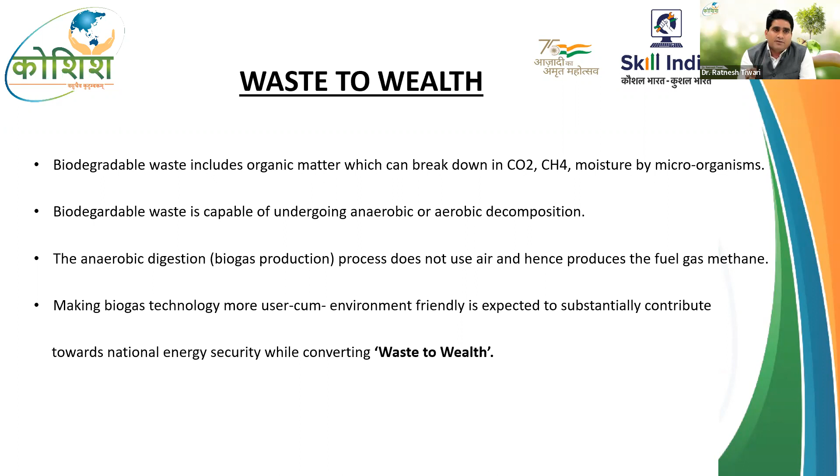Biogas production refers to degradation of biodegradable waste in the absence of oxygen, known as the anaerobic digestion process. The total biogas production in India at the moment is around 2.07 billion meter cube per year, however our potential is much more than what we are producing at the moment.

So biogas is the mixture of many gases: methane 55 to 60%, carbon dioxide 35 to 40%, and other gases like H2S and water vapors are also there.

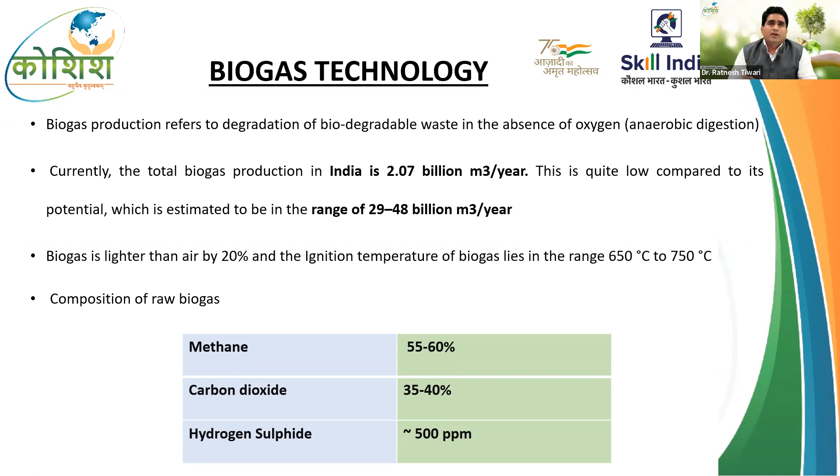If we compare biogas as a clean fuel with other fuels like LPG, CNG, and firewood, the calorific value of raw biogas is 20 megajoules, while LPG and CNG are 46 to 50 megajoules. But after purification, when we extract CH4, the main gas from biogas, it gets compressed and filled into cylinders. That purified biogas, after extracting methane, will have almost the same calorific value as LPG and CNG.

So this is a very useful gas for our energy needs, and it's also very clean, as this is renewable energy produced from waste itself, creating wealth from waste.

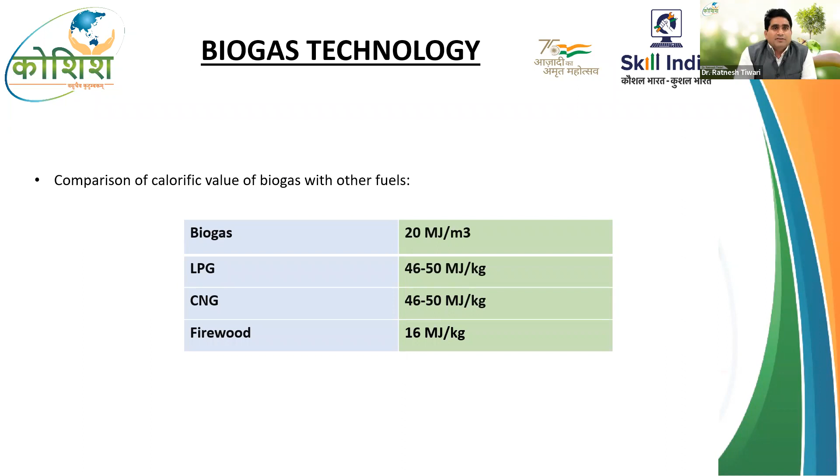The basic process of anaerobic digestion involves 4 reactions taking place: hydrolysis, acidogenesis, acetogenesis, and methanogenesis. Since organic matter has a very complex structure, microbes play their role in decomposition and fermentation of this organic waste, and lastly methane, CO2, H2S, and water vapors with some other small amounts of gases are produced.

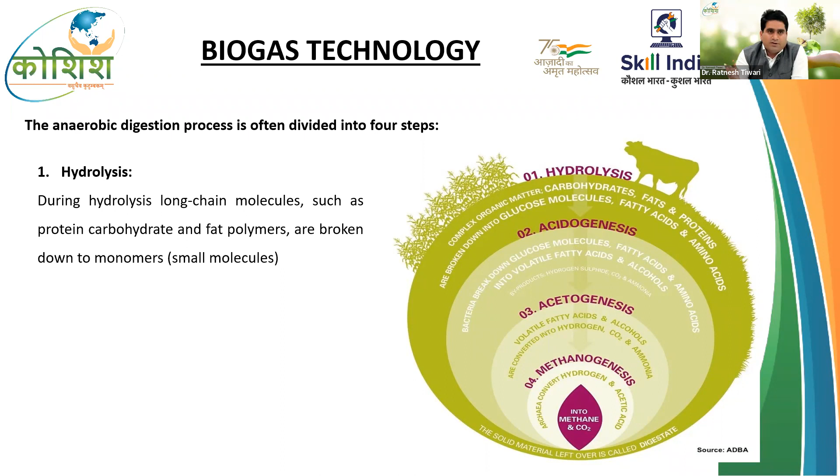So these mainly 4 reactions are taking place inside the digester, and after that, the biogas is getting produced.

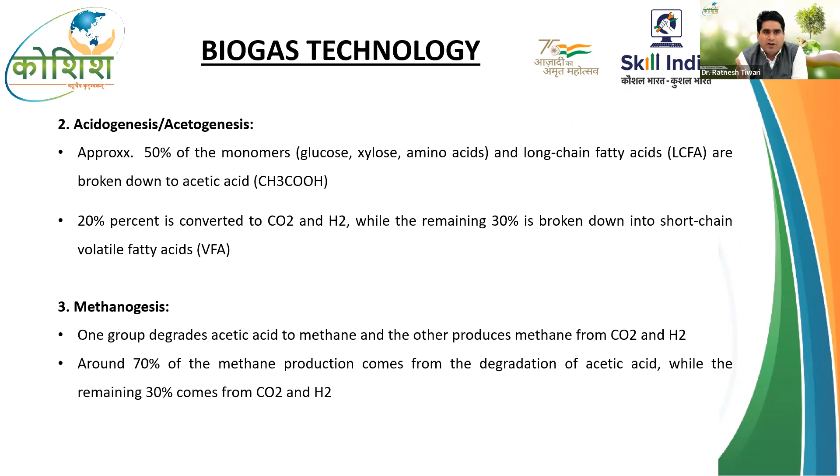If we talk about the overall technology process, we have the waste collection platform where waste is collected, then pre-treated if there is requirement, such as agri residues which are pre-treated before going to the digester. Then it is mixed with water, and the mix enters homogenizers to break down large particles into smaller ones, especially food waste and other waste of bigger size.

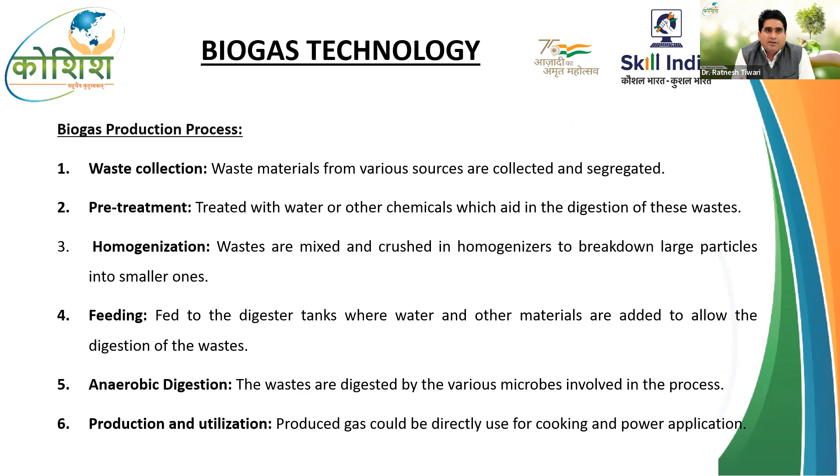Then this is fed into the digester where anaerobic digestion takes place. After that, the biogas is collected in the gas holder, and the slurry gets out from the outlet pipe to the outlet tank. So waste goes into the waste collection platform, then into the inlet tank.

It is getting homogenized with water at the right ratio of solid content required for the biomethanation process. Then the waste goes to the digester from the inlet, and the gas forms after the HRT, which depends on the waste material.

So gas is generated and collected in the gas holder, and the fertilizer as slurry gets out from the outlet pipe to the outlet tank. After the slurry forms, that is a mixture of solid and liquid mixed with the organic material, which can further be used as organic manure.

That can also be used in the form of green coal by briquetting or making pellets of this material.

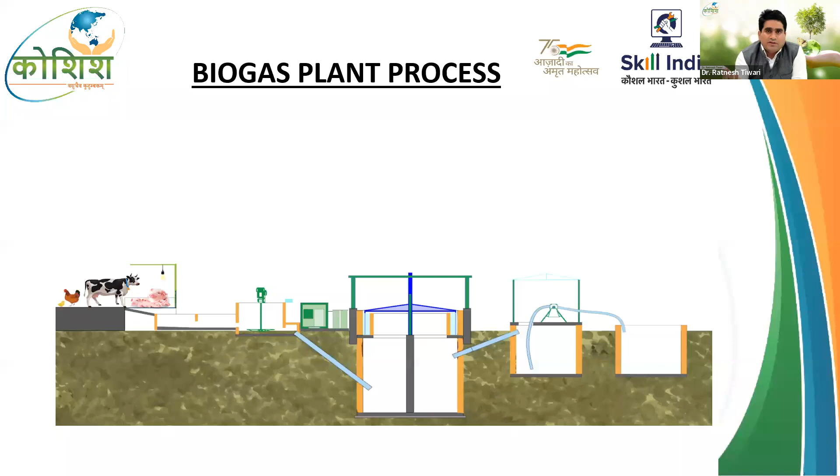Overall, when biogas is produced, we can use it for heating purposes. We can use the raw biogas directly after eliminating H2S, CO2 and moisture. CO2 removal is an extensive process.

Upgradation of biogas is required, with purification by removing these impurities. Our main content is CH4, methane, so removing CO2, H2S and moisture is required for vehicular and commercial application. If we are going to use it as a transport fuel, it needs to be purified, compressed and bottled in cylinders before using in vehicles.

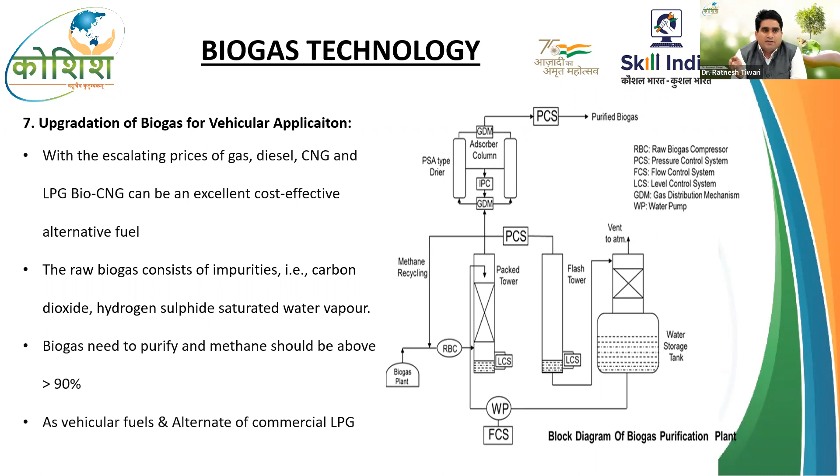There are many factors which affect the biogas production process, like CN ratio, carbon and nitrogen ratio, optimum 20:1 to 30:1. And the dilution, mixing water with the organic material, to maintain a proper TS inside the digester, that is 7 to 10%. The pH value around 7 is required. The temperature in the mesophilic range, 29 to 40, is very much optimum for this condition.

HRT is exactly the time span the organic material survives in the digester before it gets fully composted. It also depends on the type of organic material. So yes, these are the factors which need to be optimized before designing the biogas technology, biogas system. It all depends on the type of waste, temperature, environmental conditions, and all these things.

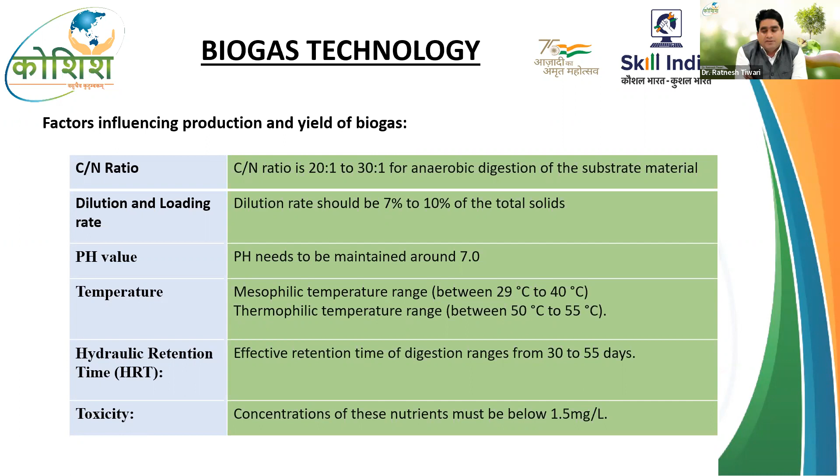Different types of organic waste are available, and they have their own production capacity for biogas. Per cubic meter of biogas, 1,000 liters of biogas is produced from 23 to 25 kg of cow dung. Earlier, the major population in India knew biogas as gobar gas. The cow dung itself does not have that much efficiency, but yes, this is very good material which acts as inoculum, as microbes are there, so that gets used in the plant.

Other wastes like poultry litter, food waste, press mud, Napier grass, are highly efficient compared to cow dung for biogas production. The property of the material also determines the amount of methane produced. Every waste material has a different methane content value. Poultry litter produces more methane content in the biogas. So a lot of biogas potential is there in the country. We are producing a lot of waste from MSW, and we have cattle waste too, so there is a good opportunity to work in this renewable energy sector.

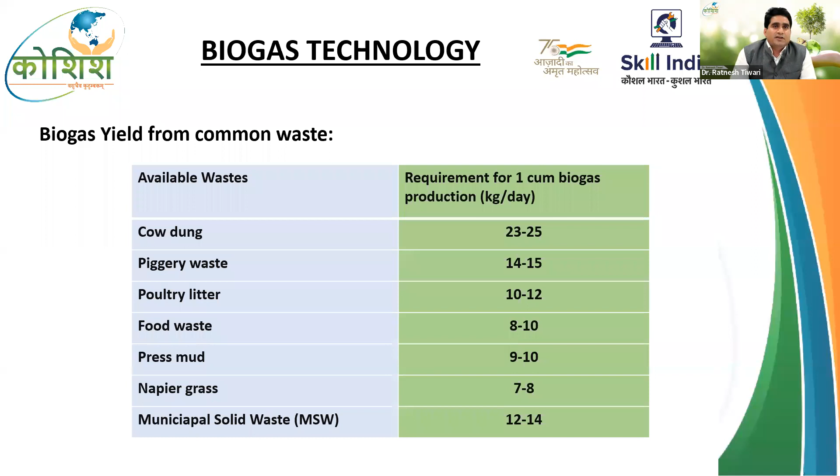So biogas, raw biogas, when it is produced, can be used in 3 different forms: for cooking and heating, bio-CNG, and power generation.

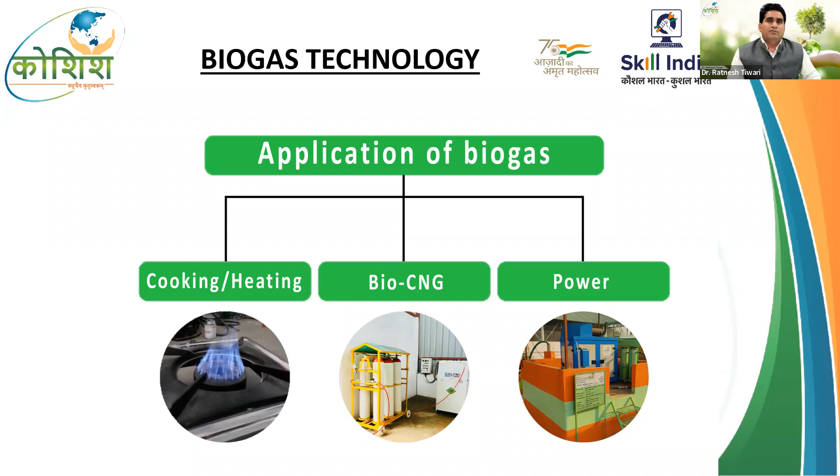This is the process flow diagram for the cooking application. As gas is produced, we use a moisture removal filter and H2S removal filters, then it can directly be used in stoves, like we use an LPG stove. The stoves for biogas use are different from LPG stoves. Other things are common everywhere, like the outlet tank and slurry pit.

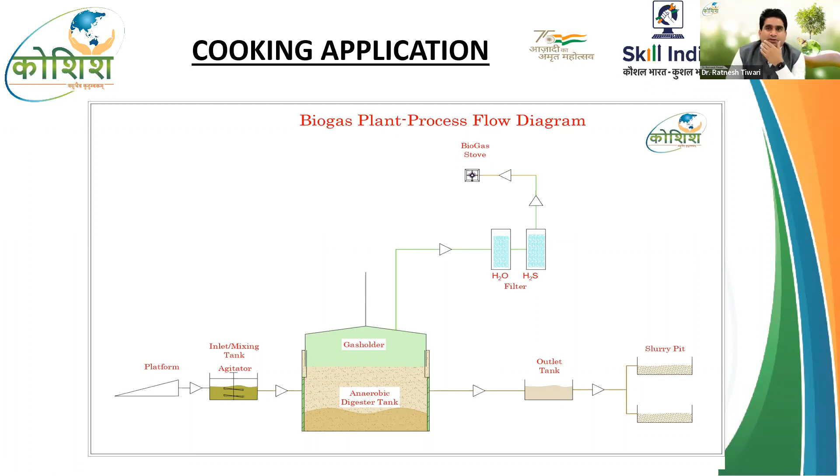Next is power production. After H2O and H2S removal, we use the gas in biogas gensets. There are highly efficient gensets available in the market, and we can directly produce electricity and power from this genset even without removing CO2 from it. Since these plants are largely for commercial purpose, they cannot be used at the domestic level, as that much material is not available domestically.

So we need a slurry separator for removing liquid and solid material from the produced slurry, and the organic manure can again be used in agriculture, and also in other ways like green coal, pelletization, and briquetting.

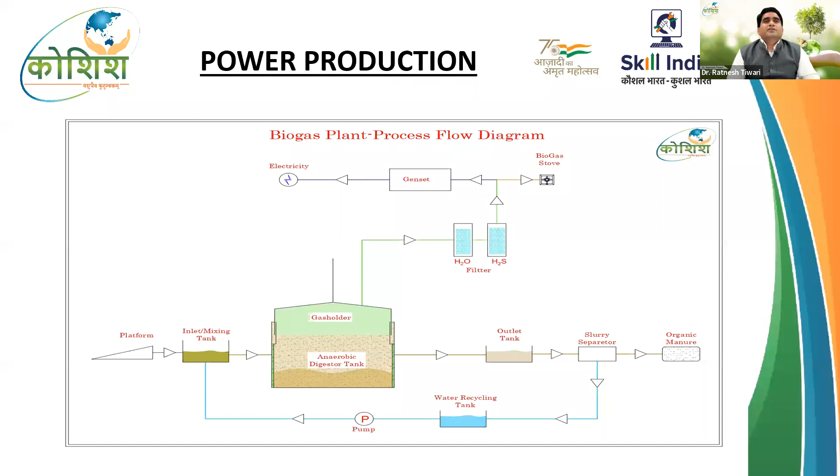Next is what the government is talking more about, this initiative of producing bio-CNG. In fact, they are targeting to install around 5,000 plants in the country to produce bio-CNG, which can be used to replace the burden of petrol, diesel, and CNG, as these are non-renewables and we are majorly dependent on imports from other countries.

Since an abundant amount of waste is available, this can be a good initiative. Whoever wants to go for a new venture can definitely choose this bio-CNG industry, as the ROI period of these plants is around three years. But the life of these plants can be considered 15 to 20 years. So there is a big opportunity for new entrepreneurs and startups to enter this sector, and this will not only achieve their financial goals but also contribute towards the environment

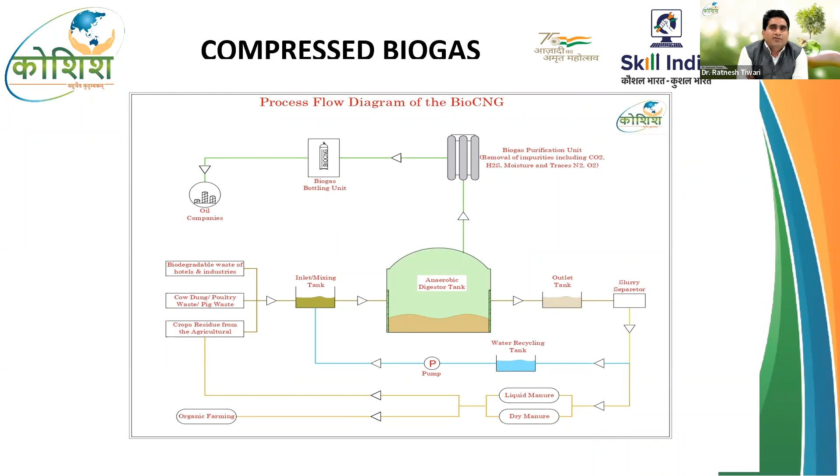So there are many advantages that we discussed - this is eco-friendly, renewable, and also the slurry we are getting from this biogas plant is very useful. That can be used in agriculture.

As I said earlier, we are working on energy, agriculture, and sanitation. So energy, we have connected agriculture with energy. Since we are producing fertilizers which are very rich with nutrients for the plants, we are promoting these manures to replace the chemical fertilizers.

As chemical fertilizers are being used abundantly, they are depleting the health of the soil, and carbon content in our soil is depleting day by day. So we need to fix some organic content in the soil. This is a good material that can be used for agricultural production, and our dependence on chemical fertilizer can also be minimized.

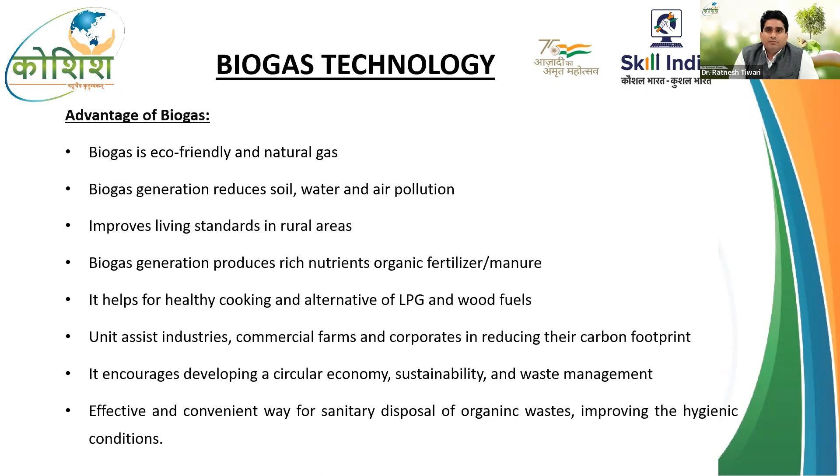So yes, this is very advantageous for the environment and also for the country. Now I will talk about what we are actually doing.

We are working on different scales, right from domestic to commercial scales like bio-CNG plants. We have plants ranging from 2 cubic meter to 12,000 cubic meter, what we are working at the moment. Commercial, residential, and industry - wherever there is availability of organic waste, we can use that waste in generating energy, and that generated energy can be used either for self-consumption or sent to the open market.

So our products are, next - we are very much focusing on the domestic unit. We have developed two prototypes, and we are working on other prototypes. The major concern we see on the ground is that earlier there were many plants constructed, but they are not functional at the moment. The problem was that they were not built with technical know-how.

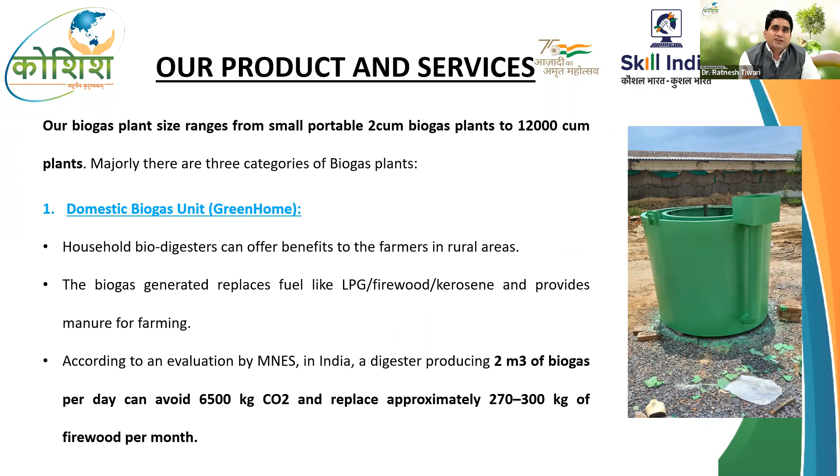As for domestic use, if we talk about LPG - if a family is using a cylinder in a month, then they are investing around ₹1,000 on that. But with a biogas plant, if you have cattle and also food waste in your home, if you use a 2 cubic meter biogas plant, you can use that gas to replace LPG for cooking purposes. Also, the produced slurry can be used in their farms as organic fertilizer.

So as you see, a 2 cubic meter biogas plant produces around 0.8 kg equivalent to LPG, which is very much sufficient - a family does not need more than this amount of LPG per day basis if they have 4 to 5 family members.

So we see that we are saving around 3,450 rupees on a monthly basis if we install a biogas plant in our home. The cost of a good quality biogas plant, on which we ensure more than 10-15 years of warranty, is around 55,000-60,000 rupees. So we are able to recover the cost in just about 1.5 years, and the warranty of the plant is more than 10 years. So this is very much useful on the domestic level as well.

Our R&D team is working on 2-3 other units also, which are more compatible and comfortable to use, like how we can better use the slurry, how we can better use the waste in the plant, and how we can increase the efficiency of the plant. We are working in that direction also, and will definitely come up with 2-3 modules in the next 1 year. Our 2 modules are already there.

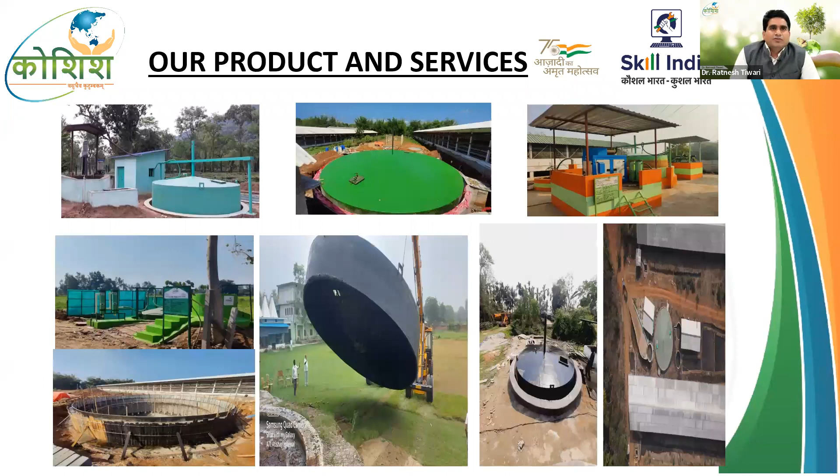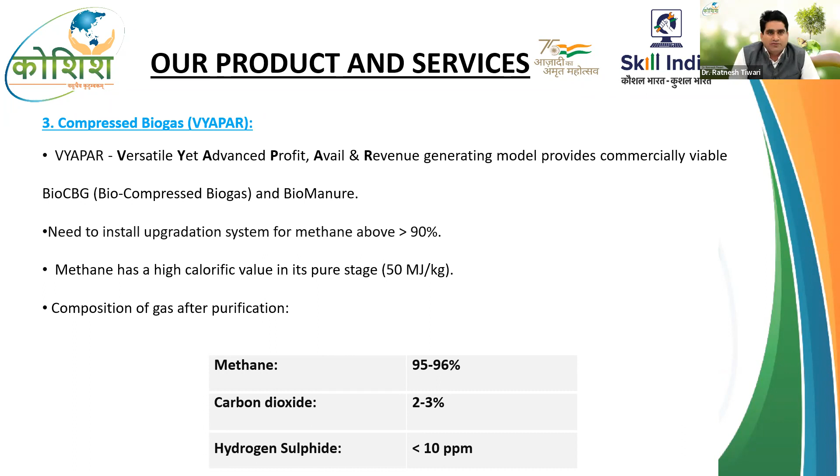Next is the compressed biogas with Vyapar model - the bio-CNG, compressed biogas. This is completely a revenue generation model, taking it as a startup, as a business. We are working in that direction also, ranging from a 1,000 cubic meter biogas plant, which produces around 400 to 500 kg of compressed biogas, to a 12,000 cubic meter plant, which produces around 5 ton of CNG on a daily basis.

As I have discussed, we are working on PSA and water scrubbing, focusing on water scrubbing, which is more efficient. The purity of gas can also be better ensured with this technology. In this biogas water scrubbing method, we basically capture the CO2 and the H2S with the flow of water. So we are using this technology.

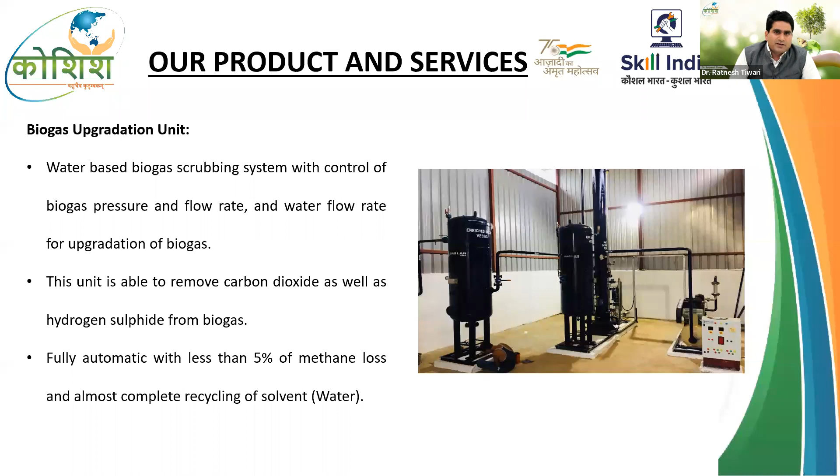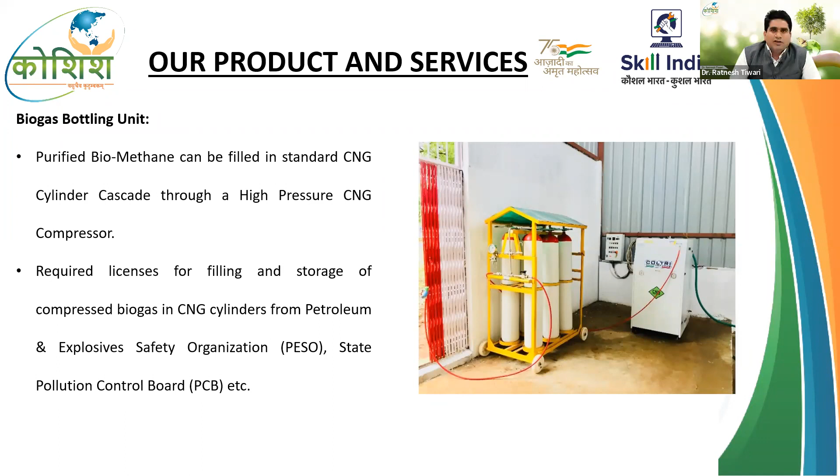Next, biogas bottling - compressors and cylinders are used for this. Compressors compress the gas at 200 bar pressure, and then it is filled into the cylinders in the form of cascades.

Also, we are taking up the challenge on the ground that if there is any plant which is not working, we take that challenge and start that plant. What I see, and what our team thinks, is that if science says this is possible, then it should be possible - why should it not work? So if any plant or any capacity is not working at the ground, please let us know. We can definitely restart that plant, optimize the efficiency, and operate it at full capacity.

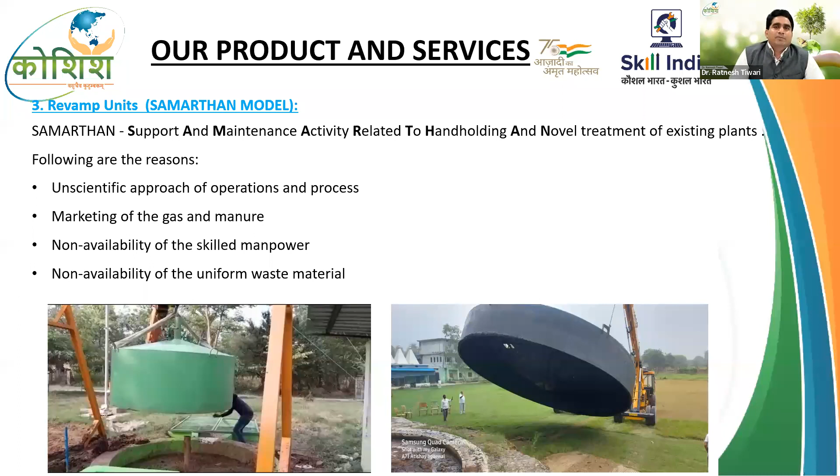So that was the part of biogas, and this is the slurry that is getting used. The slurry produced from the plant is highly nutrient rich, and we can see that it has higher NPK values than other manure farmers are using as organic material. So this can be used on the farms. Also, value addition can be done by producing PROM, phosphate-rich organic manures, and other value additions can be done depending on the need of the farm, plant, or soil. So this is a big opportunity, really very useful for the farming community.

Also, this slurry can be converted into biomass pellets and briquettes to produce green coal. I call it green coal because the pollution coming from this compared to raw organic content is very low. In fact, the Ministry of Power has also advised reducing coal consumption in thermal plants by using a 5 to 10% blend of biomass pellets. So this slurry from the plant can be converted into green coal, biomass pellets, and supplied to power plants, since it meets the criteria they are actually looking for.

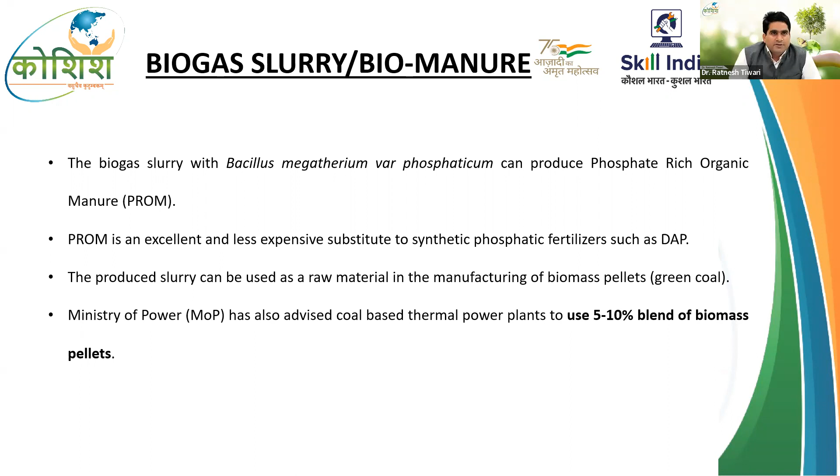As I talked earlier, there is a lot of opportunity since our government is also trying to reduce carbon emissions to go for net zero. So renewable energy sources are very much important, and managing the waste also plays an important role in production of this renewable energy. So yes, there is a lot of scope. There are a lot of drivers which are really making this sector very important, very useful.

As we see, more than 60% of the population is still living in rural areas, and they have cattle, they are producing a lot of organic waste. So the domestic sector itself has a big market. Also, community level plants can be made at the panchayat or village level, which can directly supply the required gas to households through pipeline, and then manure can be used in the farms. So a lot of cattle waste and MSW waste is available. A lot of opportunity is there.

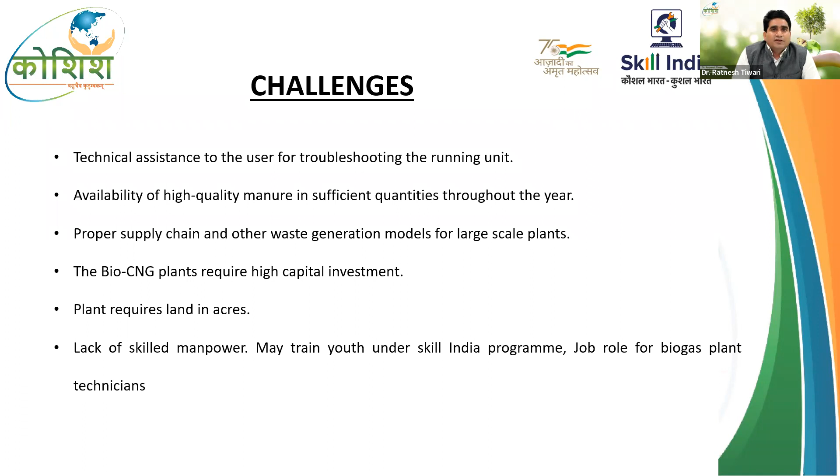Also a major concern is capital investment, since capital investments are high for these commercial plants like Bio-CNG. So special attention is required at the bank level. People are looking for funding, but they are facing many challenges at the bank levels, and this industry is facing an issue with that. Also, as I said, waste is available in abundance, but a proper supply chain is also required so that the plants can run efficiently as per their technology and manufacturing system.

This is what we are doing, and this is very much required for the community, for the environment, and for our initiative towards net zero. Sustainable development is development that meets the needs of the present without compromising the ability of future generations to meet their own needs. So we can work on our present generation also, and definitely save the environment and resources for future generations as well. Thank you, this is all from my side.